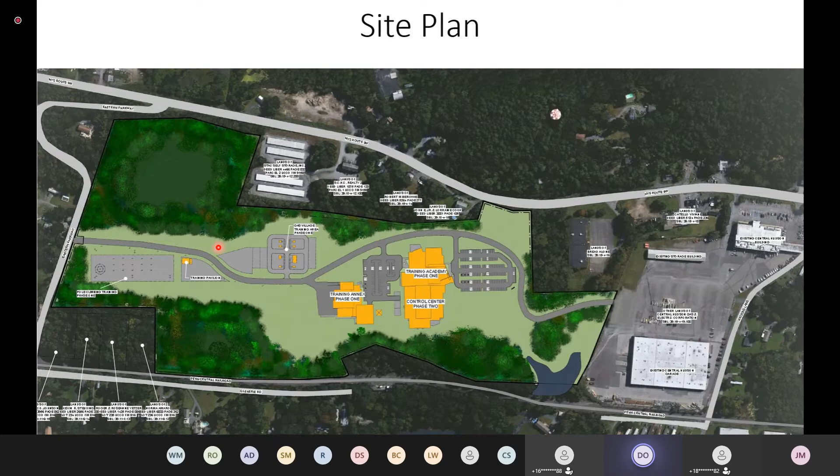So hopefully never. But coming into the new site, south and north, eventually when it's all completed, you will drive by parking lots, and then you'll see our primary control center and our training academy side by side. Keep following the road past our Annex on the left, and you will pass our gas village on the right. And continuing following the road up, we have our electric training area. So I'm going to talk about each of these in detail in a little bit, but just talking about what we're doing right now.

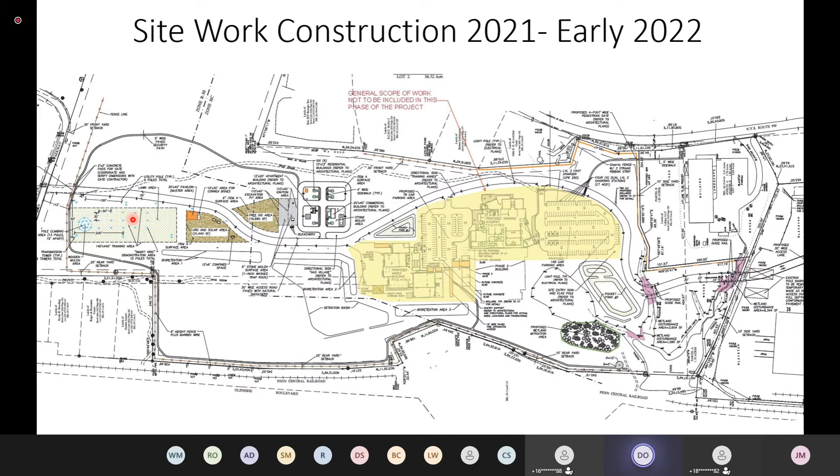So just going through our construction schedule a little bit, grading is ongoing, and that will continue to the end of the year. That's leveling the site, making it a useful site, separating and stockpiling material. We're going to begin installing our utilities. We've already started to install drainage and water. We're looking to start electric next month.

Blasting is, I know, on everybody's radar here. So we needed to do this to eliminate the large outcropping of rocks that were throughout the site, to install our drainage structures and detention basins. Unfortunately, due to unforeseen circumstances, rock blasting is anticipated to continue for another 2 weeks. But our construction manager is trying to shorten this duration. We have also begun constructing our gas village buildings, pouring our footings and our walls.

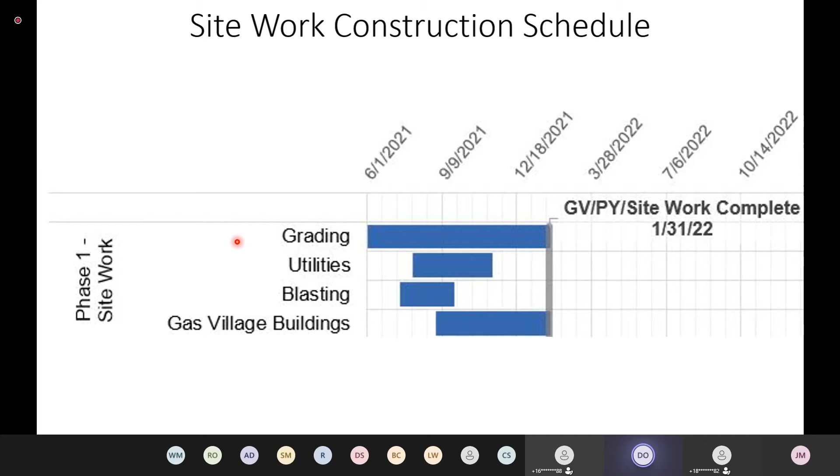So going back to our site plan, we'll start with, you see the circle to the south, that's our gas village again, and the electric to the north. Hey, Dan, I'm sorry. The question was asked where the Bread Alone building is, so maybe we can just point that out. Bread Alone is right there. Yep, sorry, I can't see the chat. Don't worry. Yes, Bread Alone is right there.

So looking at first the electric site on the north side, this is a place for our electric folks to practice climbing poles, working on smart devices, switches, capacitors, everything that goes into running our electric grid. Our underground training area is for URDs and underground electric work, and we'll have a solar area to provide training and possibly power the facility in the future.

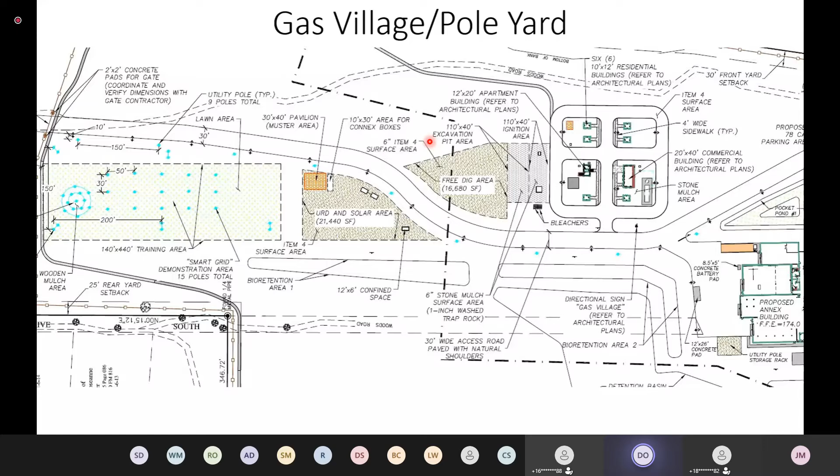The gas area has a free dig area, an excavation pit, and a small gas village to conduct training and emergency response procedures. The actual gas village will consist of 6 of these small residential buildings, and when I say small, that's a 10 by 12 structure, so nothing more than a small shed there. One more larger apartment building, which is 12 by 20, and then a larger commercial building, which is only 20 by 40. So these are all very small buildings that will be used for training.

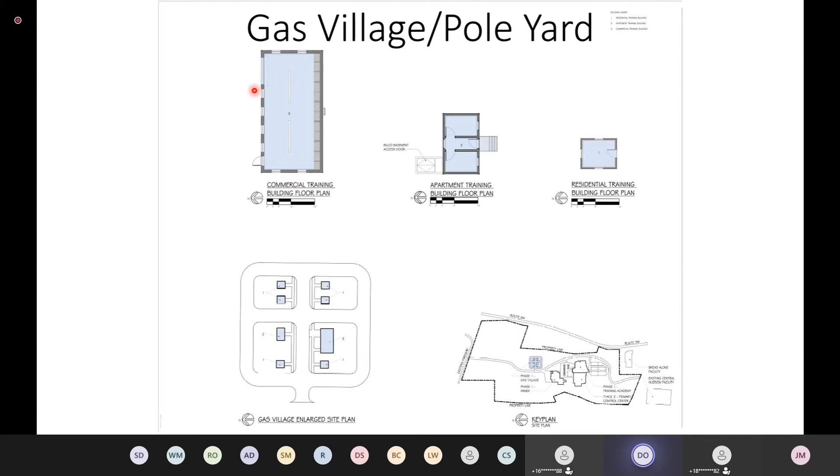Moving into our stormwater management, we have an approved SWPPP plan in place that was approved by the town, and we're following all DEC requirements. We are using a collection of stormwater management practices to control flow and keep as much water on site as we can, including grading, swales, drainage pipes and structures, culverts, detention basins, and bioretention areas. So our design was designed to control water and to keep it on site more than pre-construction. So at the end of this, we will be keeping more water on our property.

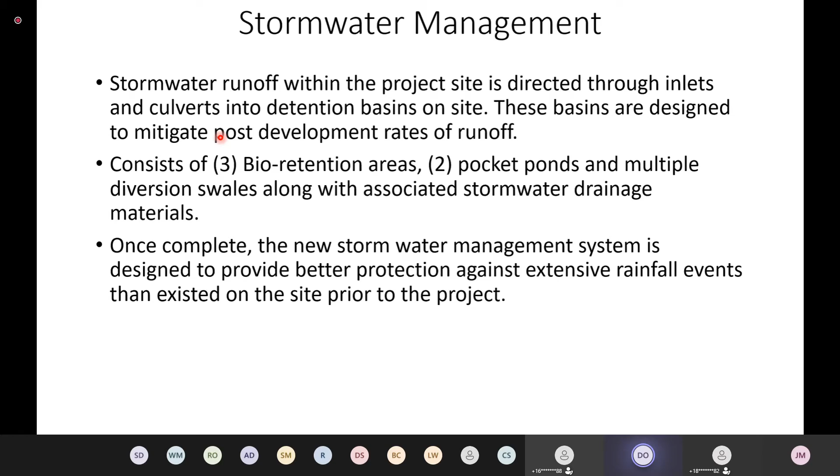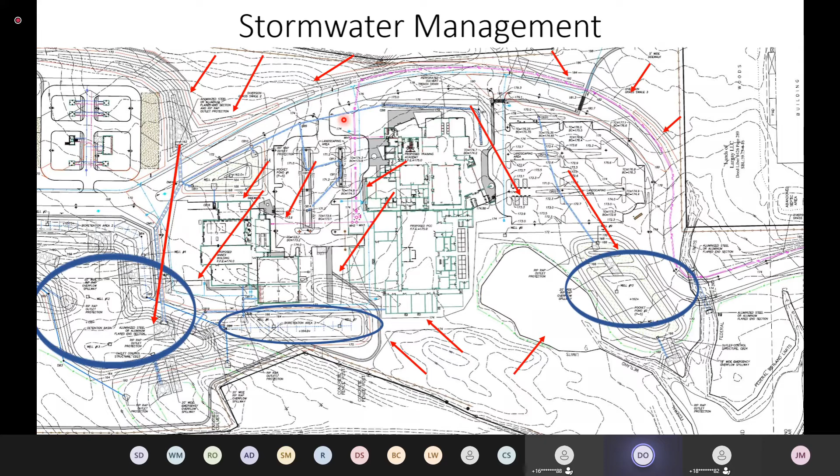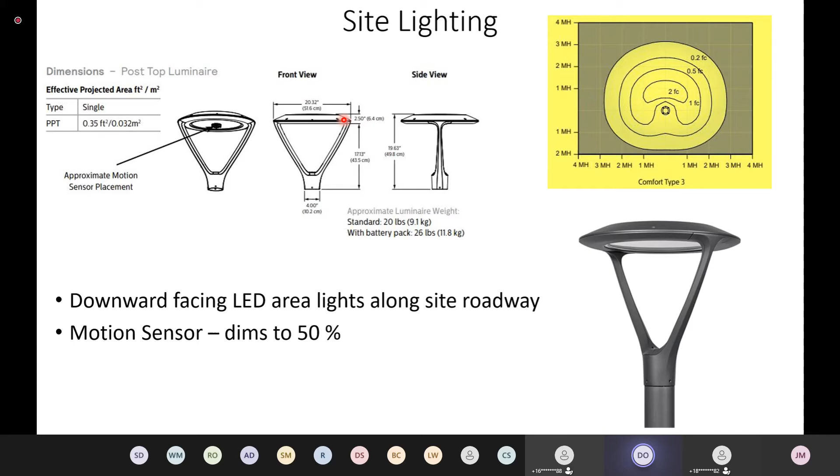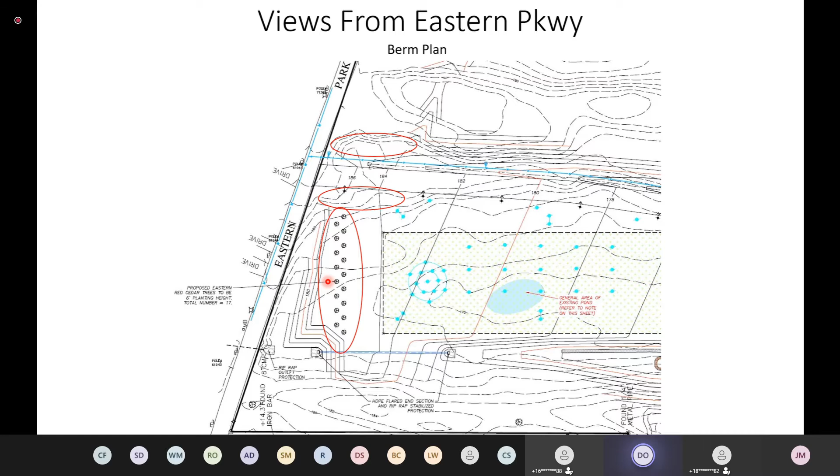This is a view of the berm that we're building. The existing trees are not there. This is just showing the berm. This next is showing the berm with the trees. So you can kind of see the trees in the background, and it's hopeful in a couple of years that they will be up a lot higher and filling this space even more.

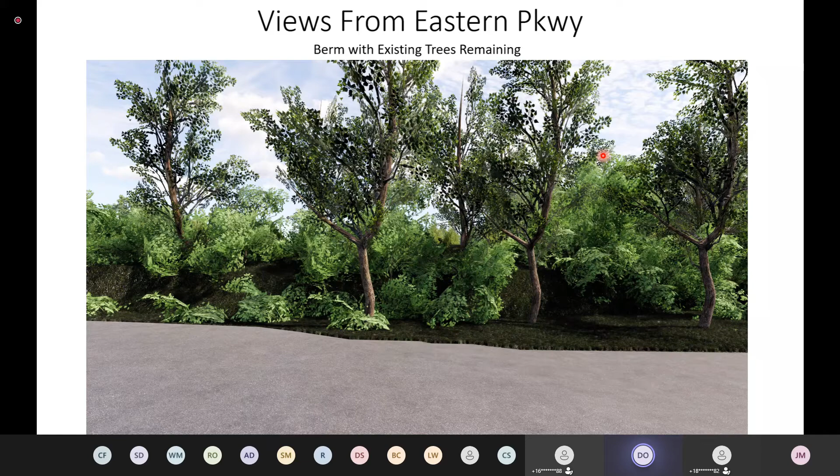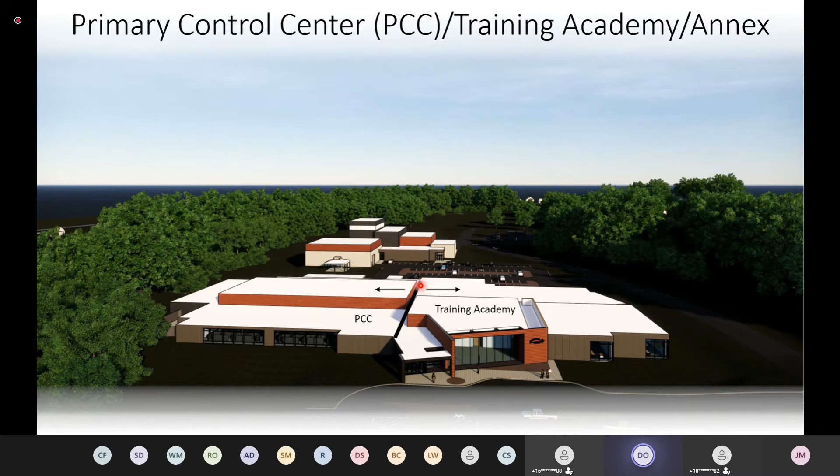Construction is scheduled to begin mid-2022 and continue till 2023 when construction will be complete. However, the building will not yet be in service until the end of 2024, as the building needs to be tested for a full year before occupation. What the PCC is, it's pretty much the brain of our electric and natural gas transmission and distribution systems. You can operate all of our smart devices, our remote operated valves. The outages are handled through this, electric outages, natural gas emergencies.

So this building is going to include both transmission system operations and distribution, as well as emergency management systems and distribution management systems. So this is a PSC mandated building. It really is the brain of our system here, and it will be in operation 24/7. It's going to be staffed by anywhere from 4 to 6 people overnight, and during the day it will have approximately 20 to 25 occupants. So the overnight will just be a bare bones skeleton crew.

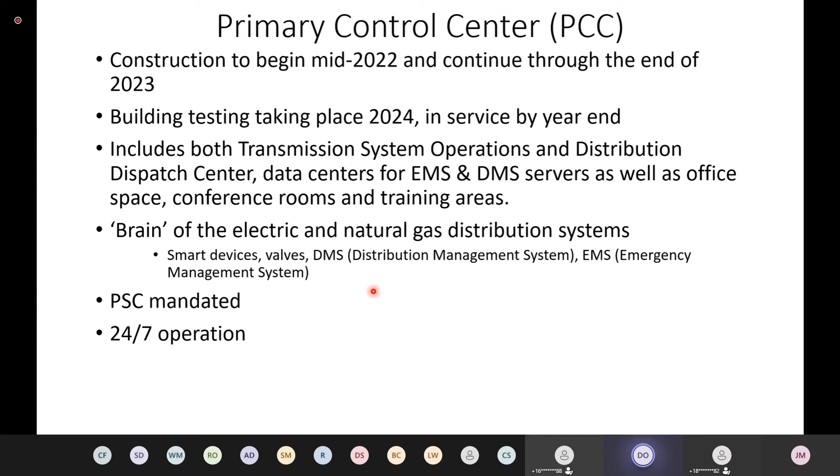Schedule on that, as we already talked about, to be completed 2023, and then another year of testing before that is in service there.

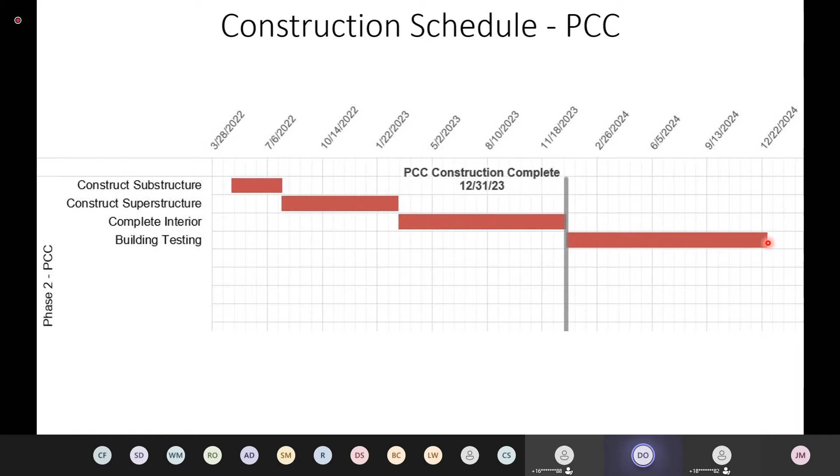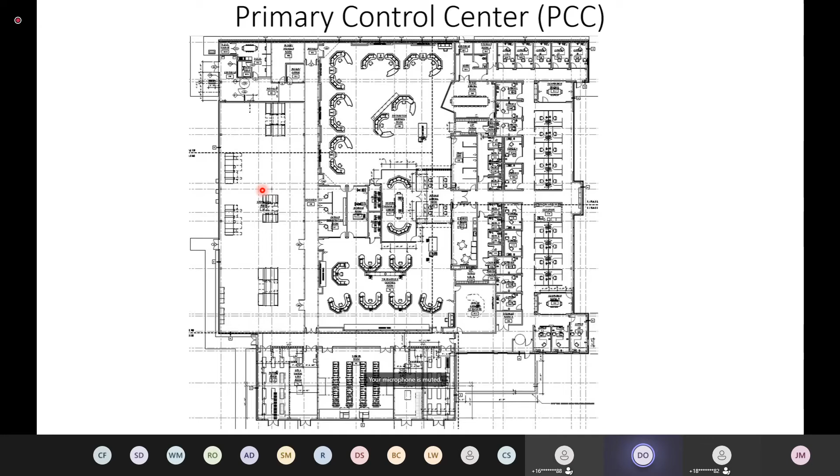This is just a floor plan looking down at what our PCC is. We have our transmission and our distribution controllers here and here. That's pretty much the 24/7 area. All these exterior offices and bathrooms and the like will not be in use, just daytime only. And most of the building, due to its technology requirements, are data centers, computer rooms, mechanical rooms, and the like. So that's what a majority of this building is. We need to provide multiple redundancies in case something happens in order to keep the electric grid operating.

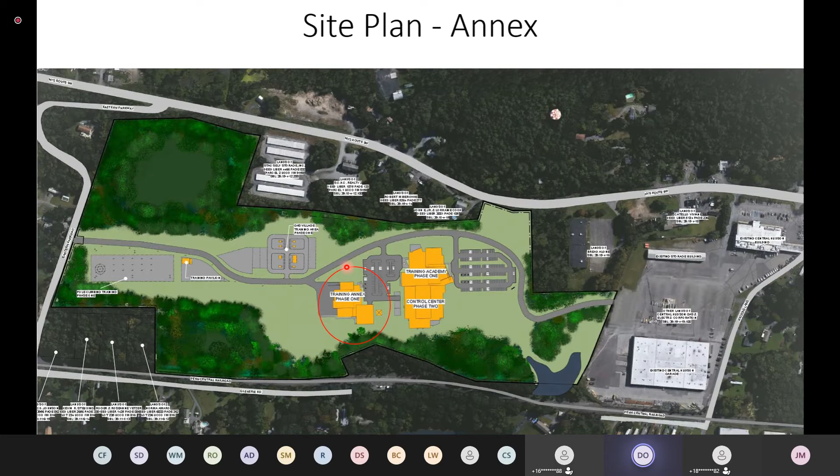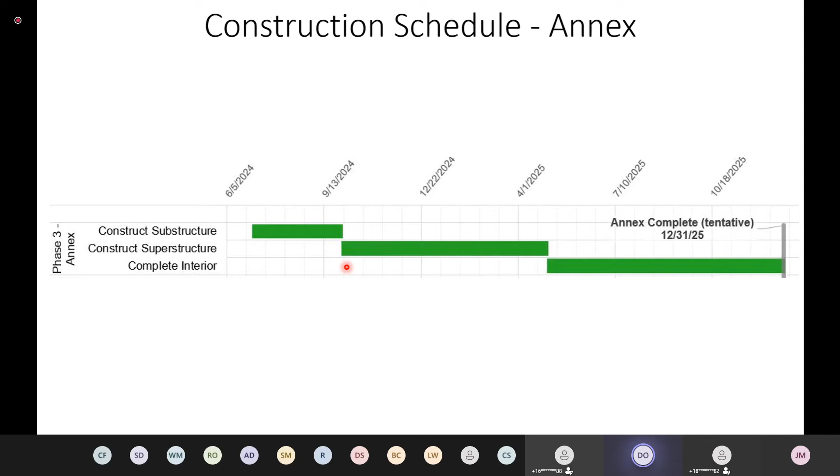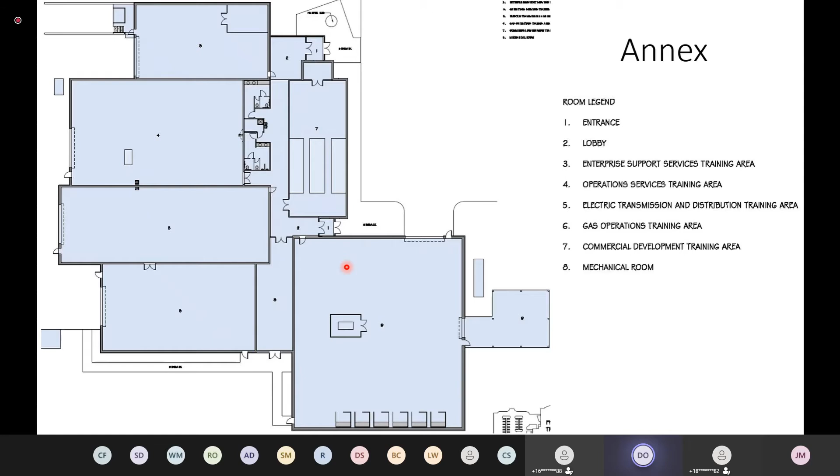The next building that's intended to be built is what we call the Annex, and it's right there next to that building behind the PCC. So the building is a utilitarian building. It's got a lot of wide open spaces, similar to a warehouse, and it allows for different sorts of trainings with different groups, and allows for trainings during inclement weather and winter months. We're looking to start that mid-2024 and complete by end of year 2025 on that building. Again, this is just a conceptual floor plan showing the large open spaces that will serve as training areas for our different groups.

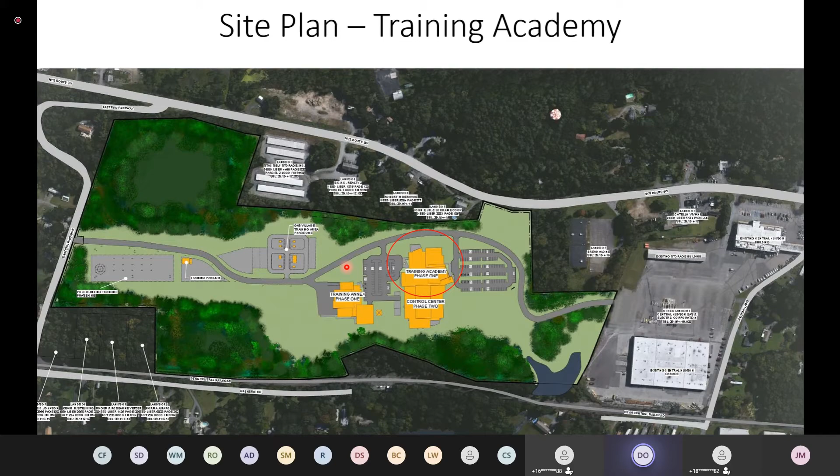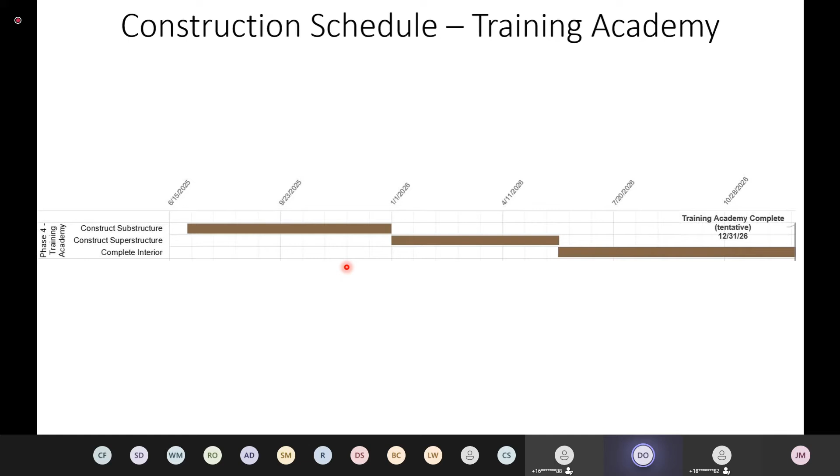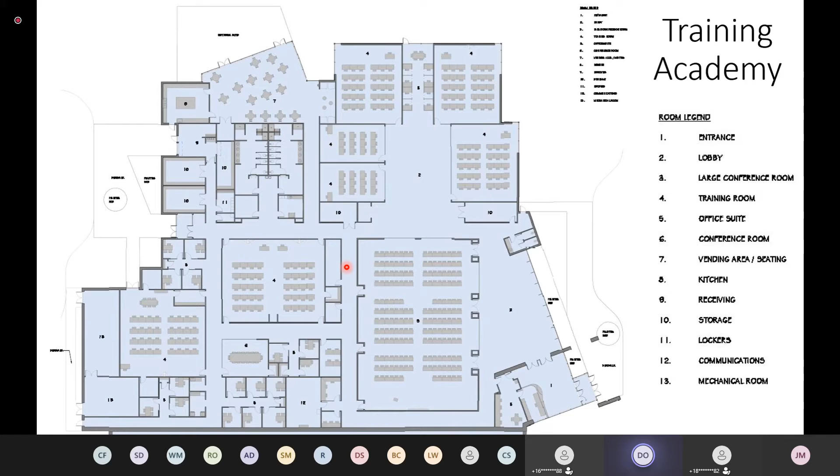And the final building that will be built is our training academy. This is going to be attached to the PCC, as we talked about before, and it is used for pretty much large meetings and trainings. There's classrooms, auditoriums. We could use this for any number of things: trainings, safety briefings, fire department trainings, local schools, classroom education programs, and the like. So the construction schedule on that is looking to tentatively begin mid-2025 and be done by year-end 2026. And again, these other two buildings, the Training Academy and Annex, will only be occupied during the day, normal working hours. So here's a picture of the Training Academy showing the classroom spaces, the training rooms, and the conference rooms associated with that.

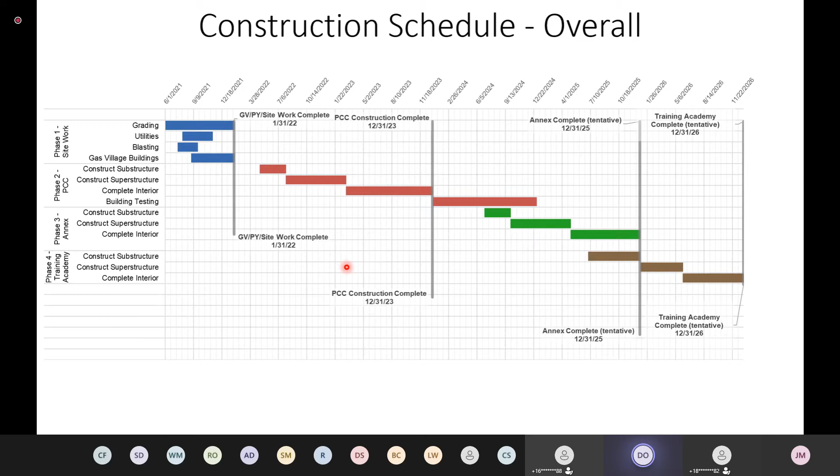Here's just kind of our overall construction schedule with a lot more details for our phase 1, because that's what we're doing right now, but the look ahead through the end of the project. There are a few benefits to our neighbors. We have enhanced electric service reliability. We're going to be reconductoring Eastern Parkway, so you will definitely notice that your outages will be less if you're living on Eastern Parkway and Glenary. We also provided a loop for the town water, so if there is a break somewhere, we can pump it through our yard and water can continue to be delivered. Of course, taxes and jobs, needless to say, and then patronage to area businesses.

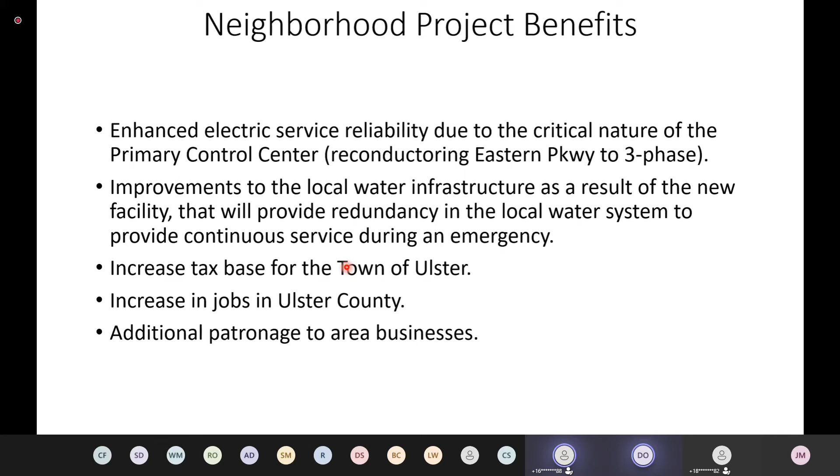So that's pretty much the nuts and bolts. I'm going to turn it back over to John, and I guess we'll field some questions. Yep, thank you, Dan. Thanks very much. So that, again, is an overview of the site with the project schedule. It is a multi-year project, but we will be very sensitive to the fact that we are working in areas where you can hear and see what we're doing. I think in the end, though, we're going to have a facility that's going to be well shielded from the neighborhood, and it should have just minimal impacts to where you live as compared to what's taking place now.